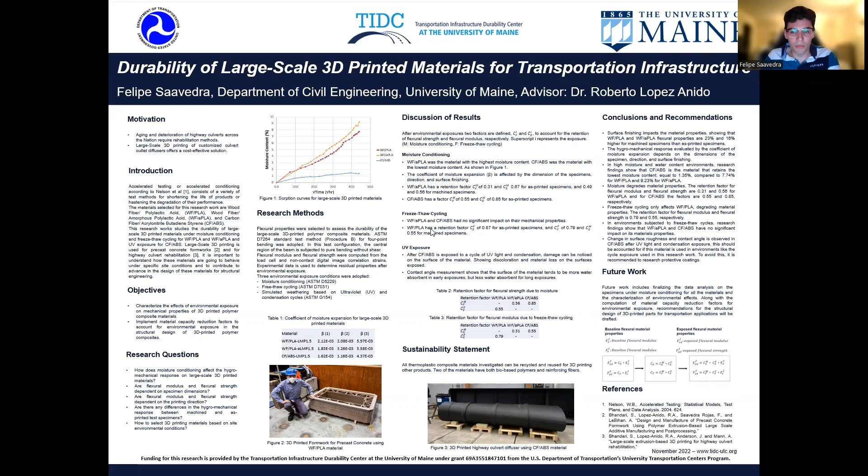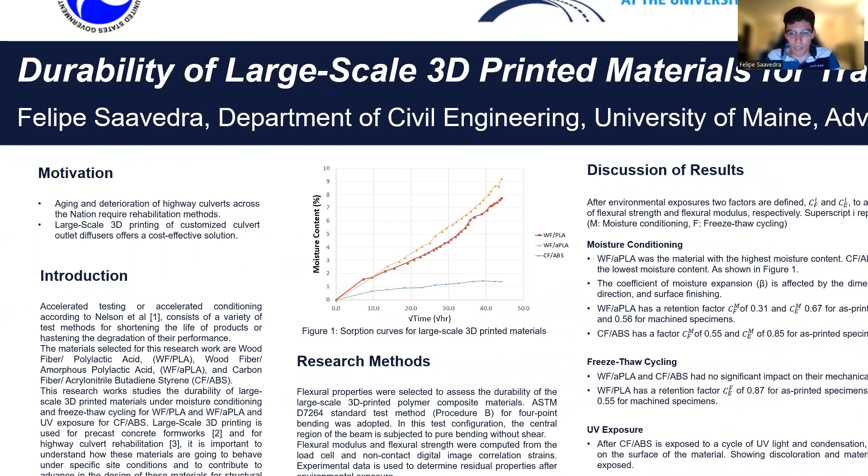I would like to start with the motivation for this research work. The aging and deterioration of highway culverts across the nation requires rehabilitation methods. We can see this on the news every day, there's always problems with culverts. Some highways get closed during several weeks because of problems with highway culverts. Large-scale 3D printing offers a cost-effective solution with customized geometries for the existing culverts.

As an introduction, accelerated testing or accelerated conditioning, according to Nelson et al., consists of a variety of test methods for shortening the life of products or hastening the degradation of their performance. Also, from the point of view of materials and structures in buildings and civil engineering, durability is the structure's ability to remain fit for purpose during its design working life.

The materials selected for my research work are wood fiber polylactic acid, known as WFPLA, wood fiber amorphous polylactic acid, known as WFAPLA, and carbon fiber ABS.

This research work studies the durability of large-scale 3D printed materials under moisture conditioning and freeze-thaw cycling. This is for wood flour PLA and wood flour APLA, and also for carbon fiber ABS, this material will be exposed to a cycle of UV exposure.

Large-scale 3D printing is used for precast concrete formworks and for highway culvert diffusers rehabilitation. It is important to understand how these materials are going to behave under specific site conditions and to contribute to advancing the design of these materials for structural engineering.

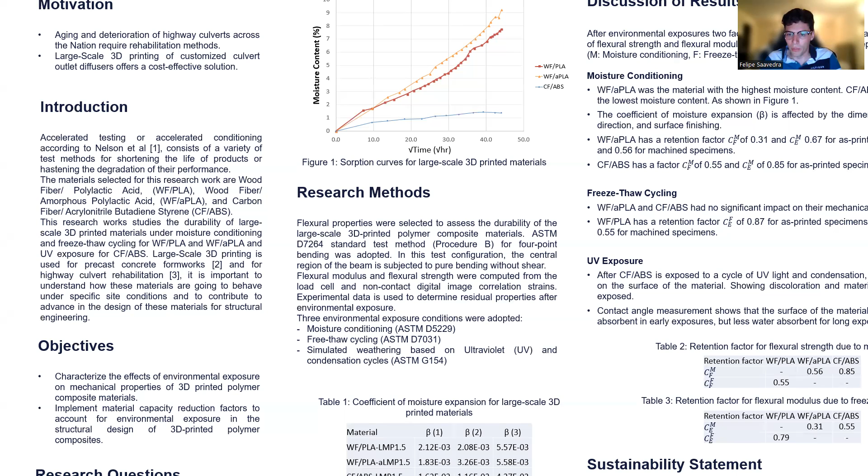The objectives of this work are to characterize the effects of environmental exposure on mechanical properties of 3D printed polymer composite materials, and to implement material capacity reduction factors to account for environmental exposure in the structural design of 3D printed polymer composites.

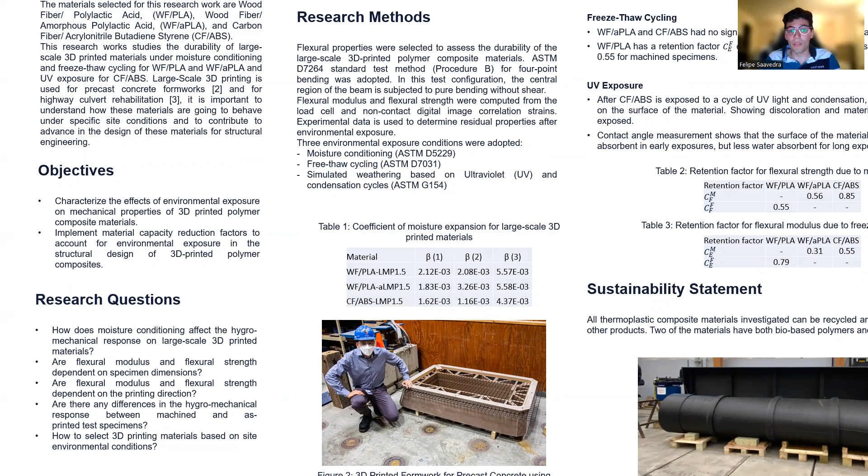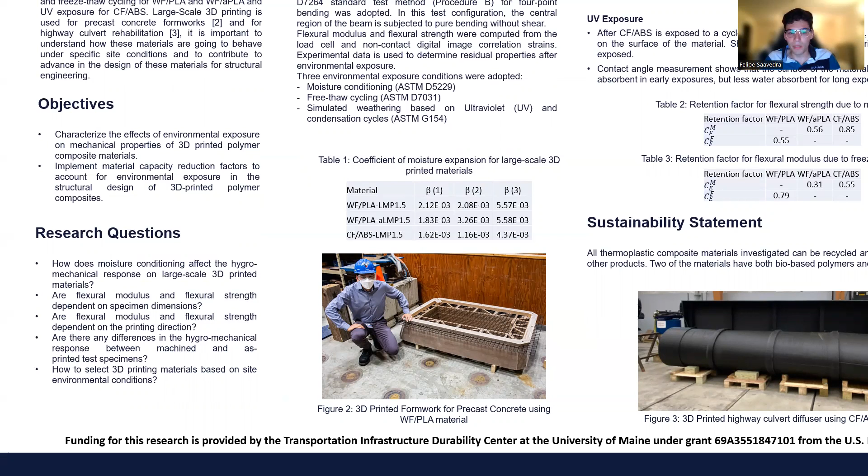The research questions for this work are: how does moisture conditioning affect the hygro-mechanical response of large-scale 3D printed materials? Are flexural modulus and flexural strength dependent on specimen dimensions? Are flexural modulus and flexural strength dependent on the printing direction? And are there any differences in the hygro-mechanical response between machined and as-printed test specimens? The last question is how to select 3D printed materials based on site environmental conditions.

Diving into the research methods, flexural properties were selected to assess the durability of the large-scale 3D printed polymer composite materials. The ASTM D7264 was the standard selected, using procedure B for 4-point bending.

This test was selected because the central region of the beam is subjected to pure bending without shear. Also, flexure does not require gripping or tabbing like specimens in tension, and with these materials in large scale, sometimes it's really hard to achieve tabbing or grabbing the specimen for testing. Flexural modulus and flexural strength were computed from the load cell and non-contact digital image correlation strains.

Experimental data is used to determine residual properties after environmental exposure. Three environmental exposure conditions were adopted: the first is moisture conditioning following ASTM D5229, freeze-thaw cycling following ASTM D7031, and simulated weathering based on ultraviolet and condensation cycles following ASTM G154.

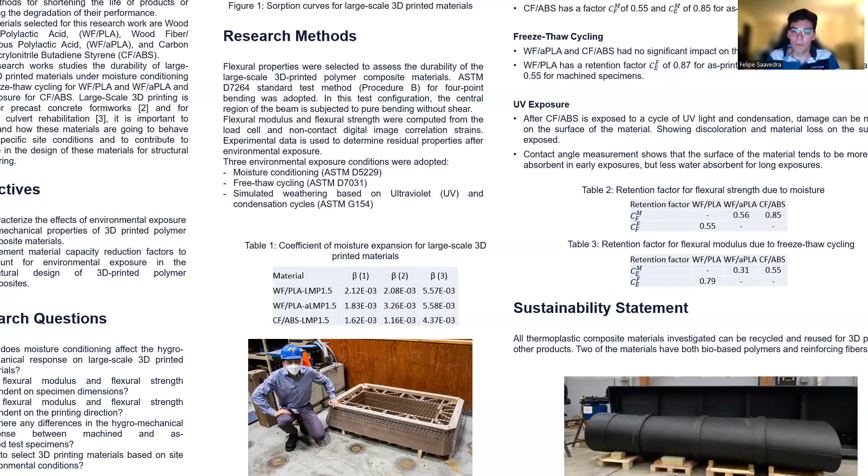Now, a discussion of the results. After the environmental exposures, two factors are defined, called C sub F and C sub E, to account for the retention of flexural strength and flexural modulus, respectively. The superscript i represents the exposure: M is for moisture conditioning, and F is for freeze-thaw cycling.

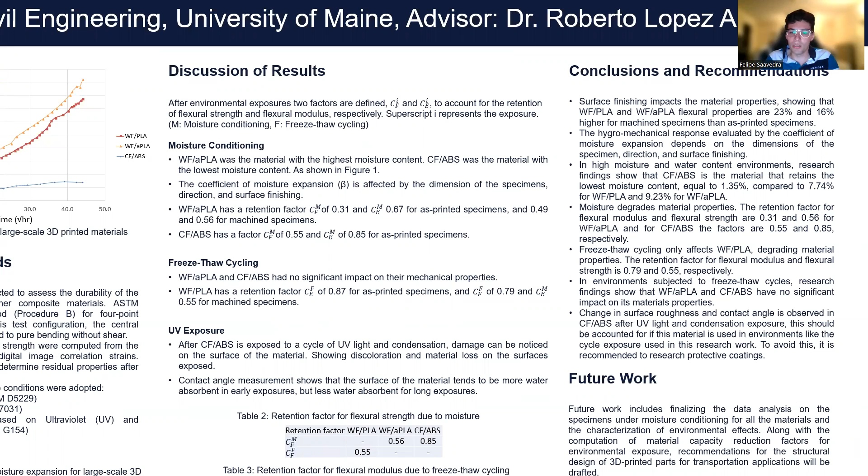Moisture conditioning, starting with the first conditioning that was implemented for wood flour APLA, this was the material with the highest moisture content, and carbon fiber ABS was the material with the lowest moisture content. If we look at figure 1, we can tell that carbon fiber ABS was less than 2%, and wood flour APLA was almost 10% moisture content. So there is a huge difference between these materials.

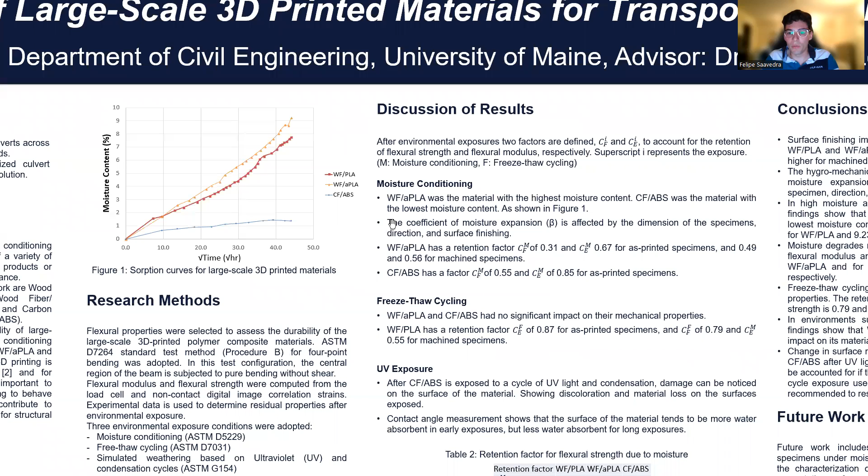Looking at the coefficient of moisture expansion, this is affected by the dimension of the specimen's direction and surface finishing. Looking at the retention factors for wood flour APLA, the retention factors for a printed specimen were 0.31 and 0.67 for flexural strength and flexural modulus respectively. For machine specimens, it was 0.49 and 0.56.

For carbon fiber ABS, for flexural strength, the coefficient was 0.55, and for the flexural modulus, it was 0.85.

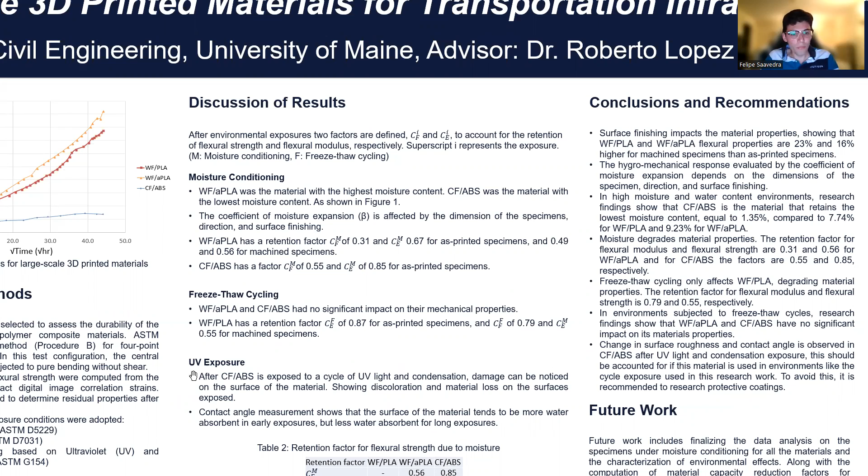Moving on to freeze-thaw cycling, wood flour APLA and carbon fiber ABS had no significant impact on their mechanical properties. Wood flour PLA has a retention factor for flexural modulus of 0.87 for as-printed specimens. For machine specimens, the retention factor for flexural strength was 0.79, and for flexural modulus it was 0.55.

Moving on to UV exposure, after carbon fiber ABS is exposed to a cycle of UV light and condensation, damage can be noticed on the surface of the material, showing discoloration and material loss on the exposed surface. Contact angle measurement shows that the surface tends to be more water absorbent in early exposures, within the first 500 hours, and less water absorbent in prolonged exposure, checked at the end of conditioning at 2000 hours.

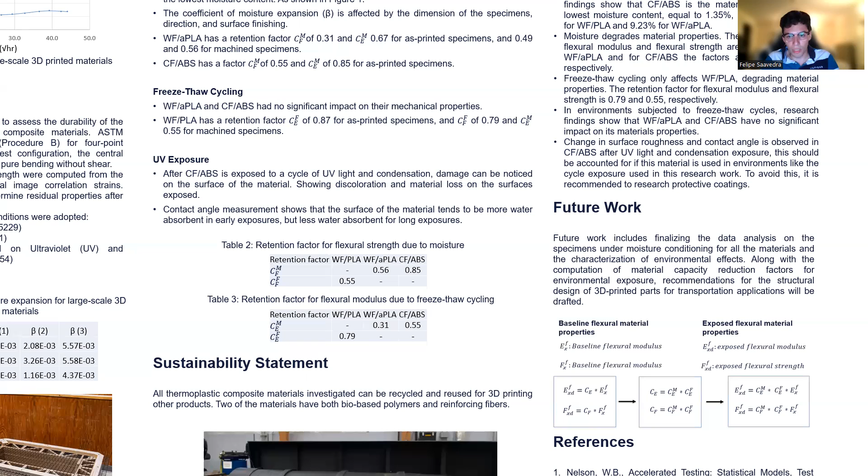The sustainability statement for this work is that all thermoplastic composite materials investigated can be recycled and reused for 3D printing other products. Two of the materials have both bio-based polymers and reinforcing fibers - this is the case for wood flour PLA and wood flour APLA.

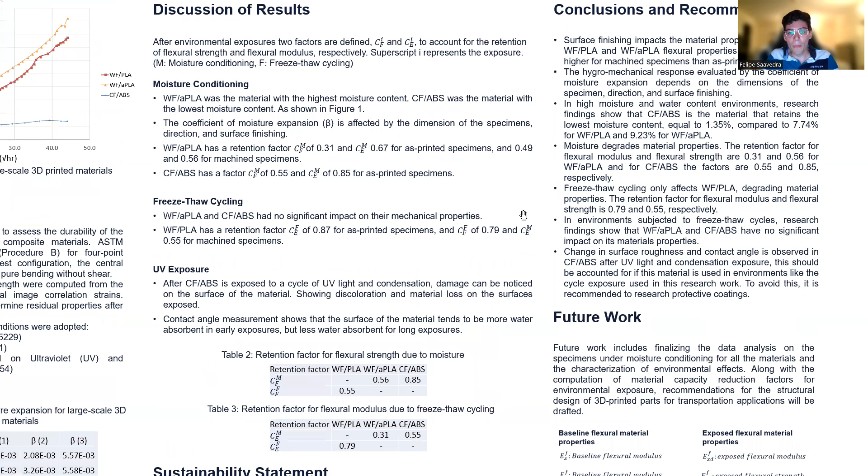Now I would like to discuss conclusions and recommendations. First, surface finishing impacts material properties, showing that wood flour PLA and wood flour APLA flexural properties are 23 and 16% higher for machine specimens compared to as-printed specimens.

The hygro-mechanical response evaluated by the coefficient of moisture expansion depends on the dimension of the specimen, direction, and surface finishing. In high moisture and water content environments, research findings show that carbon fiber ABS retains the lowest moisture content, equal to 1.35%, compared to 7.74% for wood flour PLA and 9.23% for wood flour APLA.

Moisture degrades material properties. The retention factor for flexural modulus and flexural strength are 0.31 and 0.56 for wood flour APLA, and for carbon fiber ABS, these factors are 0.55 and 0.85 respectively.

For freeze-thaw cycling, this conditioning only affected and damaged wood flour PLA, degrading material properties. The retention factor for flexural modulus and flexural strength were 0.79 and 0.55 respectively.

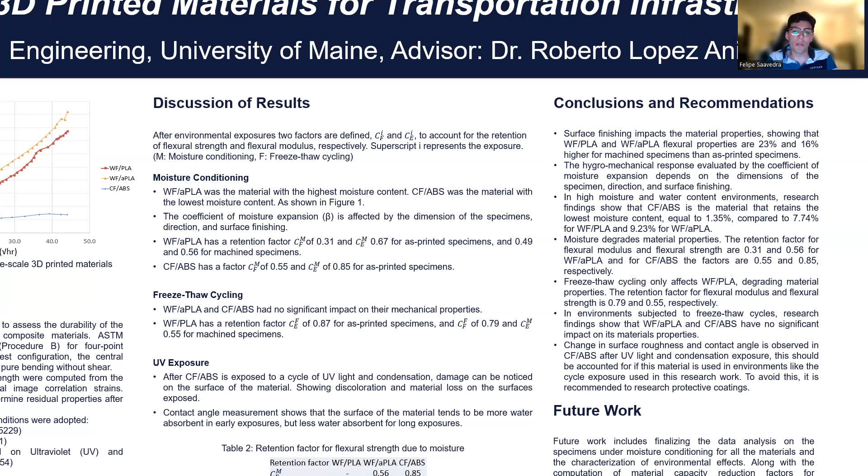In environments subjected to freeze-thaw cycling, research findings show that wood flour APLA and carbon fiber ABS have no significant impact on their material properties. A change in surface roughness and contact angle is observed in carbon fiber ABS after UV light and condensation exposure. This should be accounted for if this material is used in environments like the cycle exposure used in this research work.

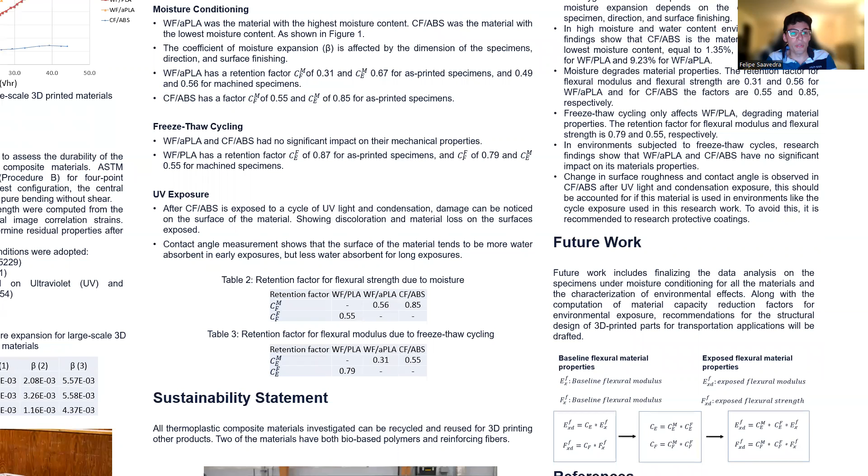To avoid this, it is recommended to research protective coatings.

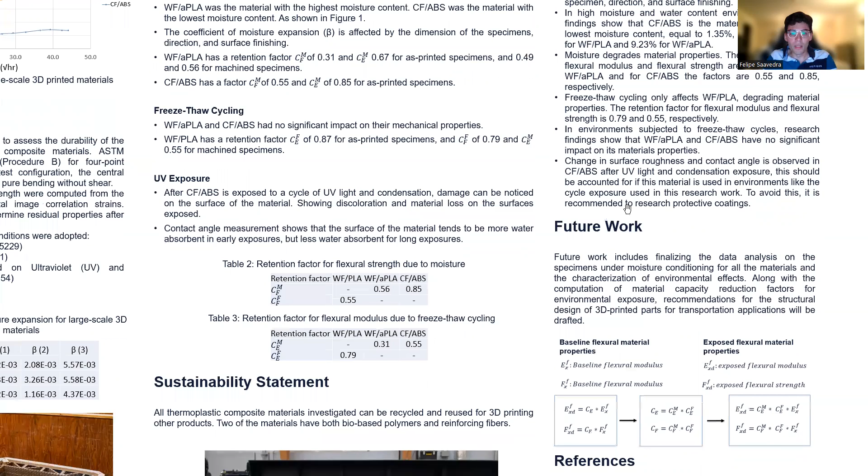The future work of my research involves finalizing data analysis on the specimens under moisture conditioning for all the materials and the characterization of environmental effects, along with the computation of material capacity reduction factors for environmental exposure, and recommendations for the structural design of 3D printed parts for transportation applications will be drafted.

Also, something I would like to mention that my research is moving towards: with my work, I was able to obtain the baseline flexural material properties, in this case flexural modulus and flexural strength, and then the exposed flexural material properties.

With this, we can obtain the retention factor that I mentioned before for each conditioning, in this case moisture or freeze-thaw cycle. So the exposed properties are going to be the baseline property multiplied by these factors.

This is the end of my presentation. I will be more than happy to answer any questions related with this research. Thank you.